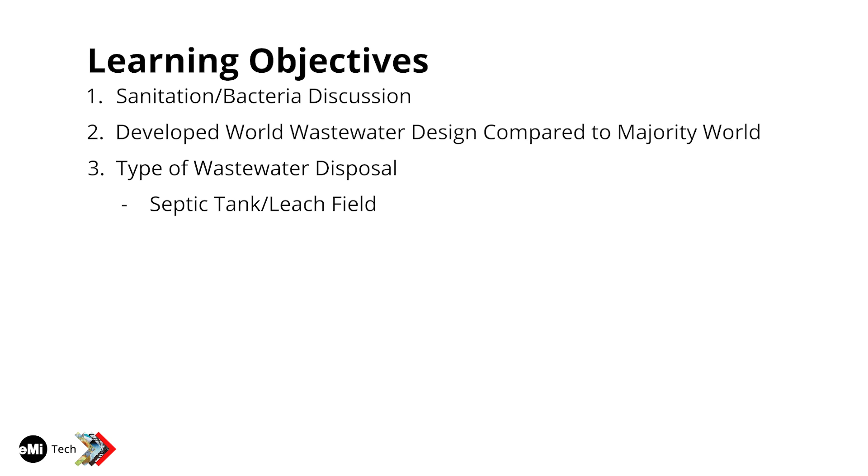So today I'm going to be talking about sanitation and bacteria. I'm going to talk about the developed world compared to the majority world. The type of waste disposal I'll cover today is septic tanks and leach fields, pour flush toilets, composting toilets, and biodigesters. But there are other types of disposal, such as lagoons and wetlands, mound systems, ETA systems. So don't think this is all there is.

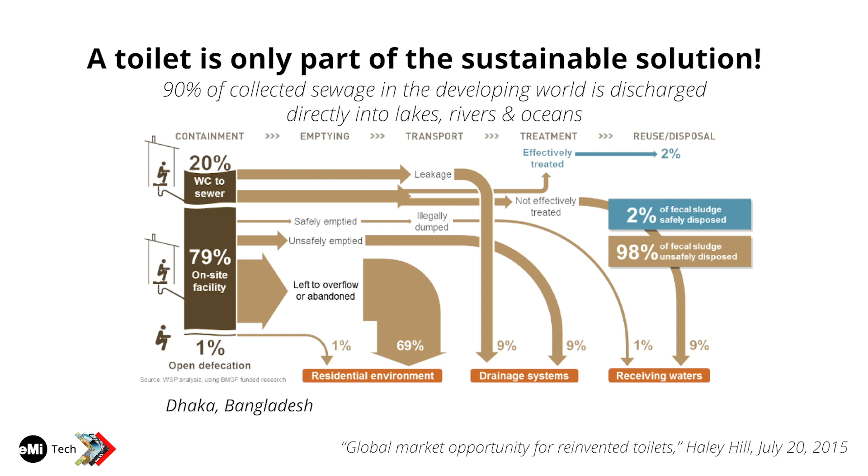This slide is very eye-opening because when we do what we do, a lot of times we think that if we put in a toilet, we've done our part and everything will be fine. But this is a study done in Bangladesh, and it showed that in this area, 20% were connected to a sewer, 79% had an on-site facility, and 1% was open defecation—which, by the way, in rural Cambodia they have 85% open defecation. What this shows is even though they were connected to a sewer, even though they had toilets, bottom line is 98% of the fecal sludge was ultimately being disposed of improperly. So the whole solution wasn't figured out.

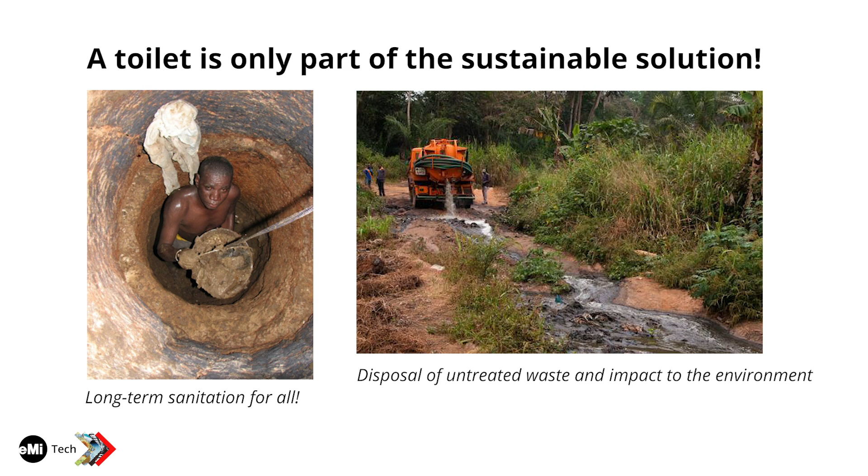So these are some pretty deep thoughts. I've seen a lot of very graphic things on my trips, but this is an example of a man cleaning out a pit manually, which means he jumps down into the pit. I've been on projects where I've seen people down in septic tanks, bucketing them out. The picture on the right is a classic place where they may pump the wastewater, which is good, but then they dump it in a place where it can go down through villages or into lakes. So there really is a lot to this.

The typical EMI design is a septic tank and leach field. But imagine if somebody from China came over to the United States and read about some poor area, and decided the United States needs help. So in a rural area, they design a biodigester with a squatty potty, and since there's over 18 million biodigesters in China, they feel they've done a good job. But the problem is in America we have abundant, cheap electrical energy, and most people won't know how to use a squatty potty. This shows the flip side - we have to be really careful when designing in other countries to truly understand their system.

The other thing I'll add is here we commingle our wastewater and sink water - black water and gray water - but sometimes on EMI trips it's really beneficial to separate those two.

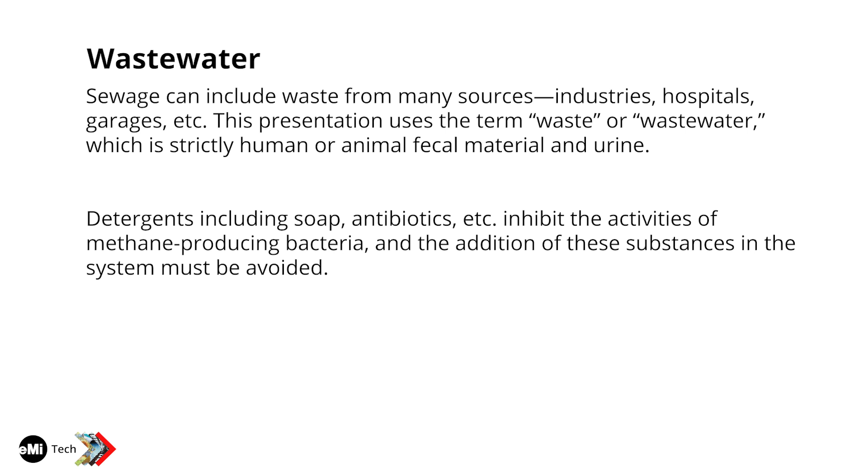During this presentation I use the term wastewater all the time, and I want to clarify that I'm talking about basic human wastewater - not the complicated wastewater we have in America with industrial waste, soaps, and antibiotics, because if you put detergents in a septic tank it's not going to behave very well. So I'm using the term wastewater pretty loosely.

For us, we look at wastewater as something icky that we don't want any part of, but you'll find that in different cultures they make use of waste - this is a very common thing. What we're trying to do is find a safe way to utilize this waste so that it's healthy for all.

On a typical EMI project with a septic tank and leach field, we have the septic tank as the main part, a distribution box, and leach fields. These leach fields are very critical in how they're designed because they have to be really flat to behave properly. We also have pipes that go to the septic tank and cleanouts. I say all this because people look at biodigesters as complicated, but even what we do here - a septic tank, distribution box, and leach field - is a pretty elaborate device.

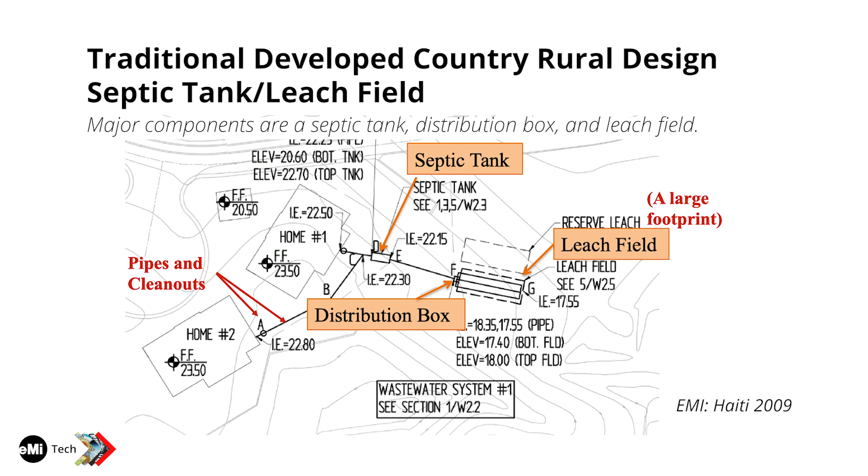In all honesty, my recent trips to Cambodia have been not only on the design phase but also construction, and I found it incredibly difficult working with contractors to build a leach field. On paper it sounds so easy, but in the field, trying to explain how small invert differences make such a big difference in keeping the area flat, I got fed up and switched to a chamber system since they sold them all over the place - it was just so much easier.

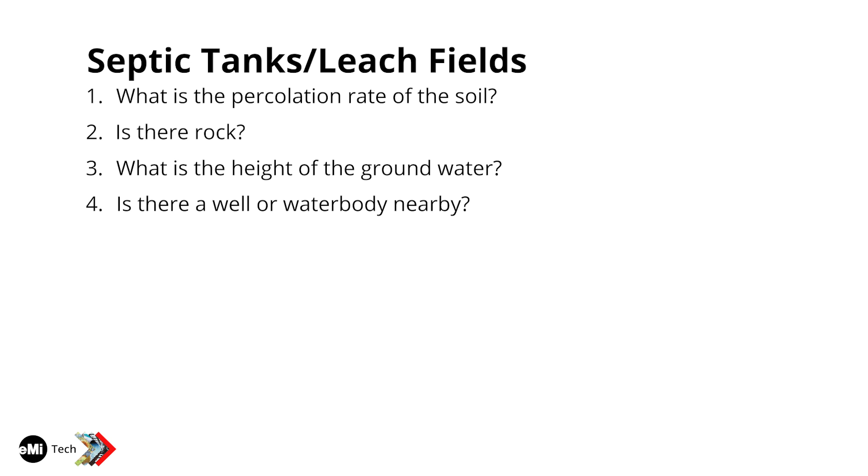Although septic tanks are beneficial, there are other issues EMI volunteers should think about before putting one in. What's the percolation rate of the soil? Is there rock? What's the height of the groundwater? Is there a well or waterbody nearby? Is there enough area for the leach field and a reserve area - that's a heavy thought, because you may first think you're okay, but you also need a reserve area. What's the topography of the site? And can you have more than one type of system?

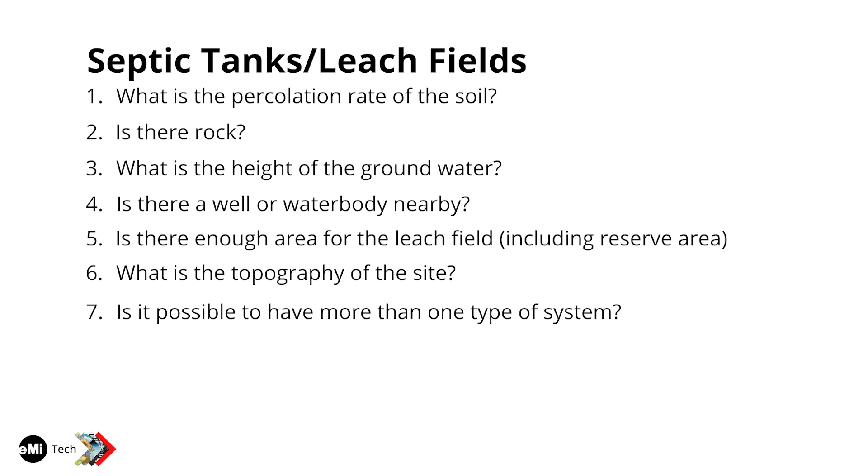Also, is there a need for compost, fertilizer, or biogas energy? The initial thought by most Americans is that pour flush toilets are terrible, but I'm going to challenge that - I actually think pour flush toilets are great, as long as they're designed properly. I've shown a couple of pour flush toilets here where the design is really good, because I like the raised floor and the fact that the water is nearby.

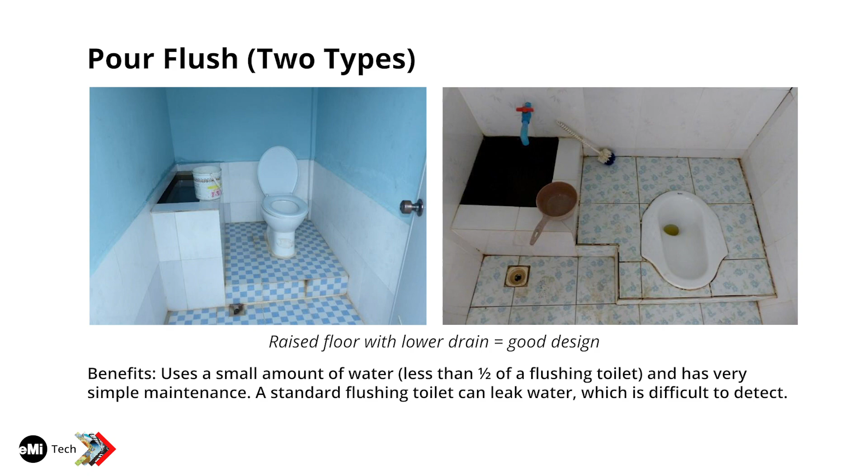With a pour flush toilet, after you do your business, you take a bucket of water and pour it in, and it flushes through. What you see on the left, even though some people may confuse it with a Western toilet, notice it doesn't have a tank - it's still a pour flush toilet. The advantage of a pour flush toilet is it has no moving parts and is very easy to maintain. In America, most people would be surprised how much water we waste from leaking toilets.

Sometimes up to 50% of toilets out there are leaking. In America, where we have tons of water, this is not a big deal. But for us engineers in places that are water scarce, if you have water continuously leaking, it's going to dry out your tank, and then you can have more energy cost. So it can be very complicated. And the flappers in toilets sooner or later wear out, so there can be a lot of challenges to them.

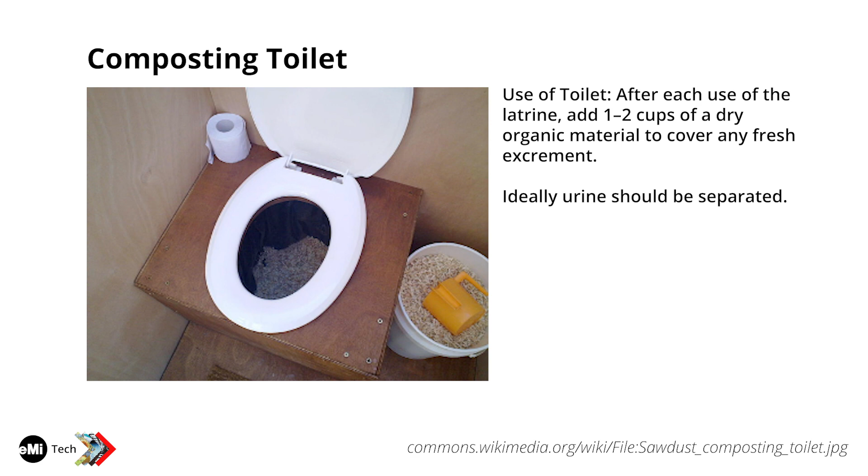Okay, so here is a picture of a composting toilet. This is a concept—I have not done one of these on a trip yet. Ironically, some people in America now are getting into this concept. With a composting toilet, what you do is, after you do your business, you take some organic material and sprinkle it on there.

Basically, what you're trying to do is get rid of all the wet areas. When it comes to dry material, there's a whole bunch of things that can be used, such as sawdust, dry leaves, grass, and so forth. Later, I'm going to show you why that's important when we talk about C/N ratios.

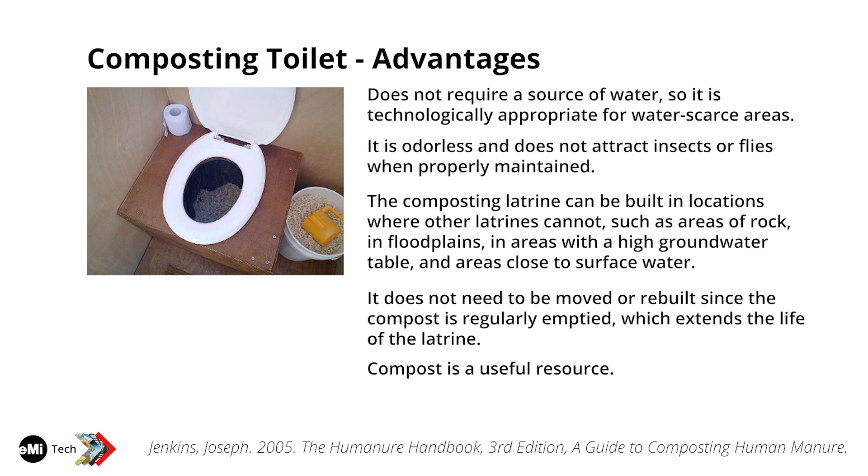It doesn't require a source of water. It's odorless, and it doesn't attract insects if properly used. It can be built in places other systems can't—like a rocky area, a floodplain, a high groundwater area, or close to surface waters. It doesn't need to be moved or rebuilt, which is really nice. And compost, if harvested, is a very useful resource. Urine, if separated, is also a useful resource.

Now, the use of urine is a very tough subject, and that's also something I have not done. But I want to talk a little bit about it because it's helpful to understand the C/N ratio in composting and how the chemistry works on all this.

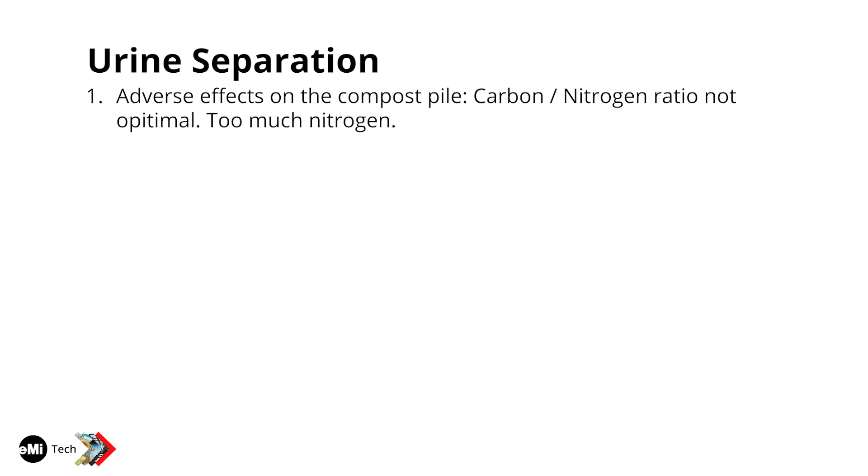The two main reasons for urine separation: when you're composting, you really need that oxygen transfer, and urine, when it wets the pile, really hinders that. The other thing is that the C/N ratio for urine is really lousy, and I have a good spreadsheet that you're going to see in a bit that shows that.

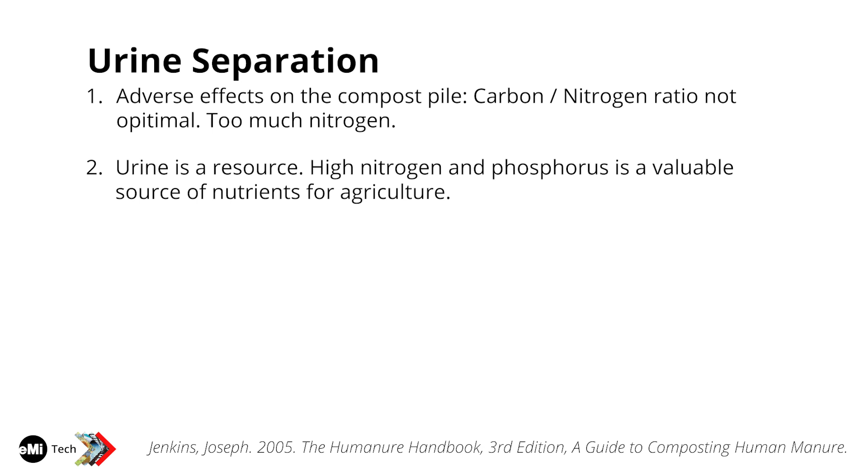Ironically, urine can be a really high quality fertilizer, and the key is mixing it with water—four parts—and then sealing the top. But I also admit that the collection of urine to use for fertilizer, how are people going to deal with that? I don't know, but I am going to put it into practice on one of the projects in Cambodia. So the knee-jerk reaction is that this would be a really hard sell. But then, when people are out there taking cow patties for fueling, it makes me think it's not such a hard sell.

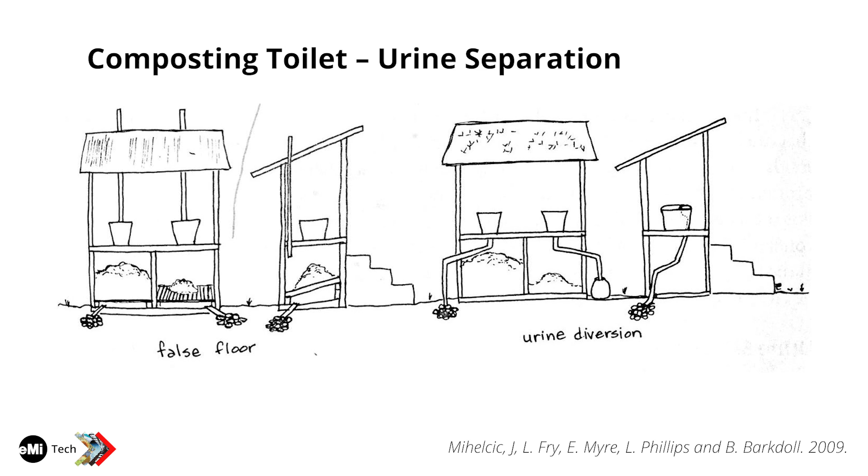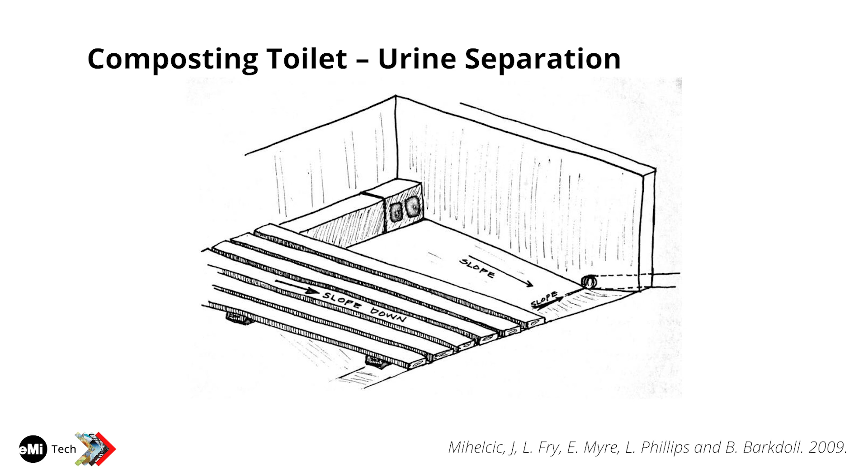Here's a close-up of the false floor, and this is a very simplistic design. In this case, the urine could either be wasted or collected. But there are also other designs that are a little bit more innovative.

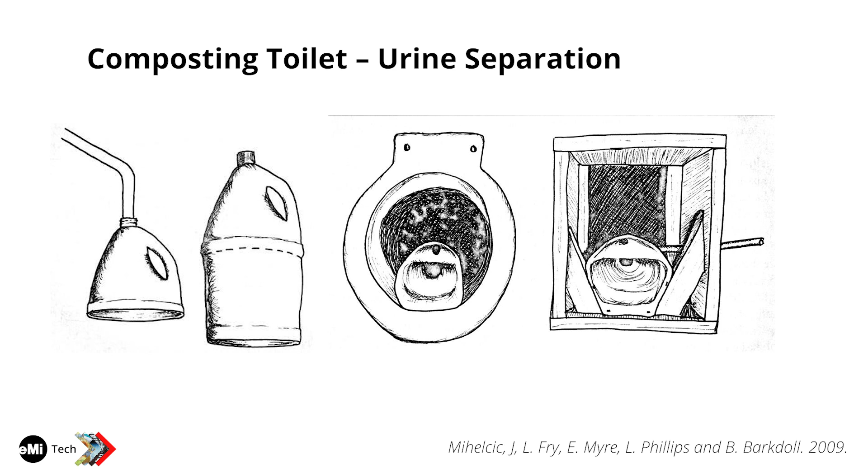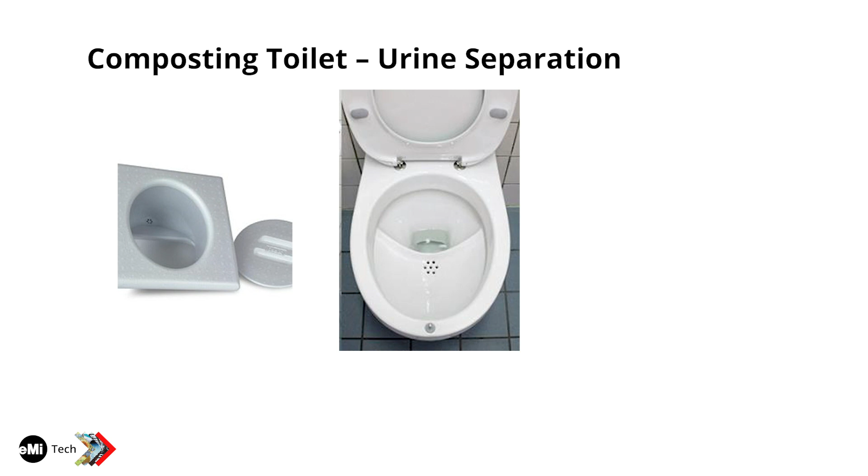On the project I was at in Cambodia, it was really common that they had urinals all over the place at the back of the buildings. In that case, it would be super easy to collect the urine. And surprisingly, there are actually manufacturers now starting to manufacture toilets to collect urine, like what you see here. Where this goes, I don't know, but I think it's good for people to be thinking outside the box.

So with compost, after it goes through a composting toilet, the material is digested and it doesn't have a lot of odor. When you think about store-bought fertilizer and put that on grass or dirt, it's easy for that to wash out if it rains. It's completely different with compost, because compost binds into the soil and becomes part of the soil a lot better than chemical fertilizer does. So it has greater fertilization value than raw manure.

I've got a slide on this later, but I'm definitely not talking about night soil. Don't ever confuse night soil, which is the application of raw wastewater in a field, with the use of composting. Two completely different things.

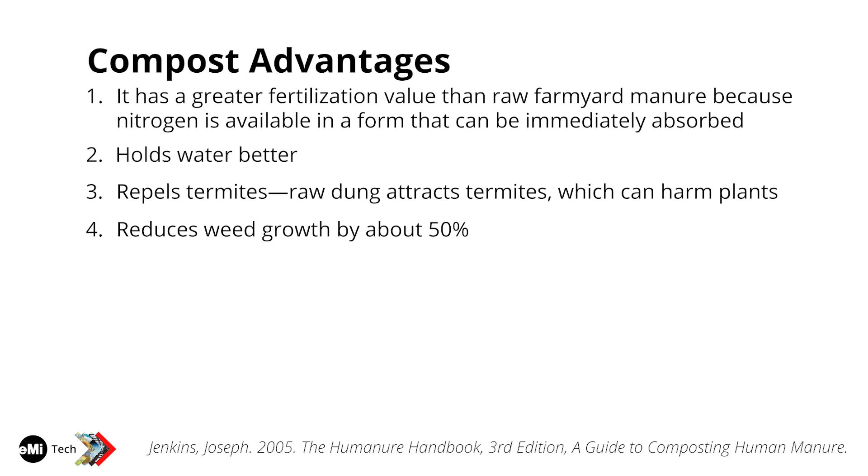Compost holds water better, repels insects, reduces weed growth, adds slow release nutrients for plant growth, and creates airspace in the soil.

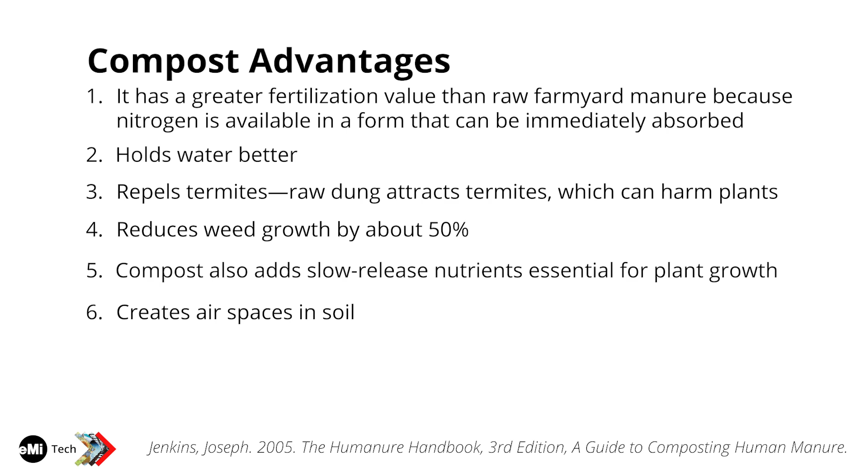Where we live, we have abundant energy, and it's really common that when it comes to methane, we flare it off. Not in all places, but it's very common, and we do that just because we have so much energy that it's not profitable to mess around with methane. So they just flare it off.

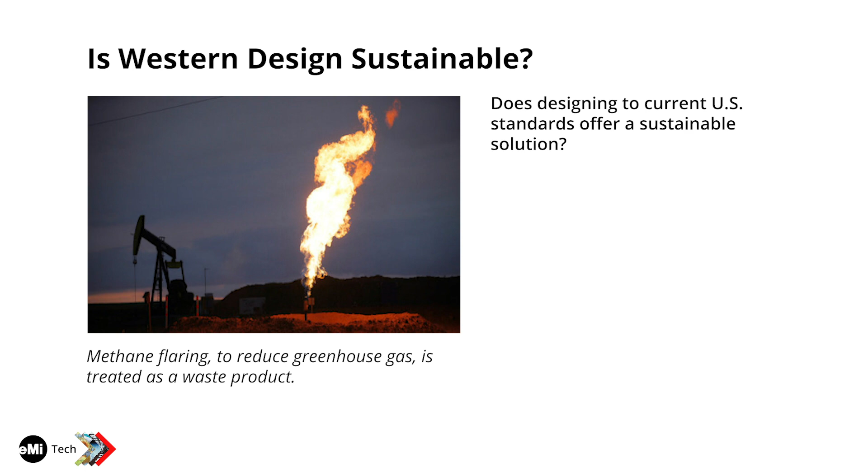We have to think about the clients we're serving and whether they have abundant energy. Another interesting way to look at this is that in our culture, we treat water, which is very expensive - it uses energy, uses chemicals, puts greenhouse gases in the sky.

But then we use that water that we treated to flush our toilets, and then that water again has to be treated, which uses chemicals, uses electricity, puts greenhouse gases in the sky. So the key is sustainability is a huge issue when we come up with designs - that's why we have to think outside the box a little bit.

I've been really fortunate because I've had the chance to go into a lot of villages, especially in Cambodia, and I can almost always tell whether a village has a biodigester in it even before I ask anybody, because in a village that has a biodigester, there'll be less waste laying around, and it won't be smelly.

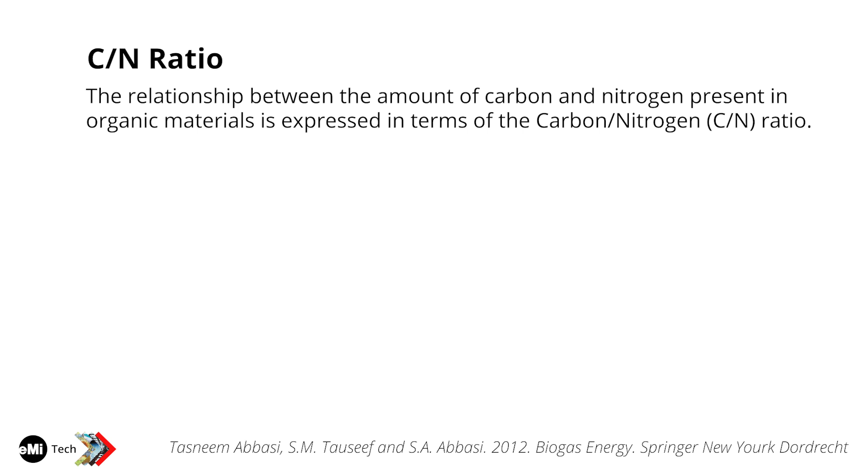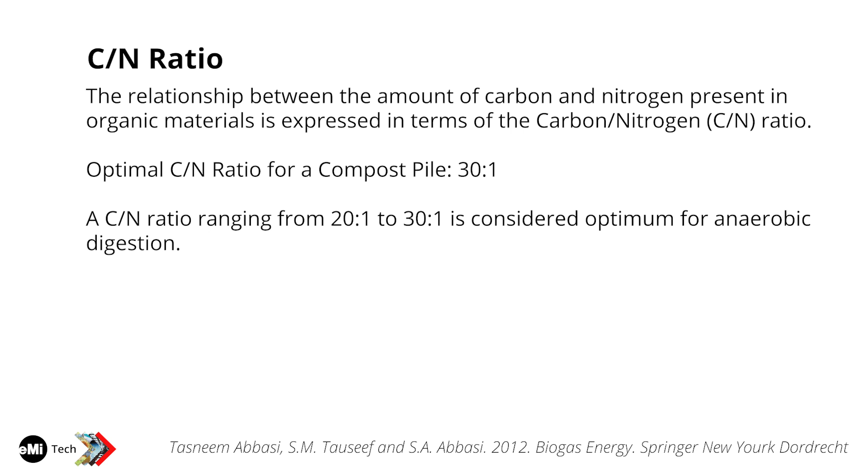Before we talk about biodigesters, I want to talk a little bit about C/N ratios, because this all ties in. A C/N ratio is a relationship between carbon and nitrogen. Our goal C/N ratio for a composting pile is around 30. C/N ratios are really tricky because if they're too high, the nitrogen is consumed rapidly by the methanogens. But if it's too low, the high pH will kill off all the methanogens.

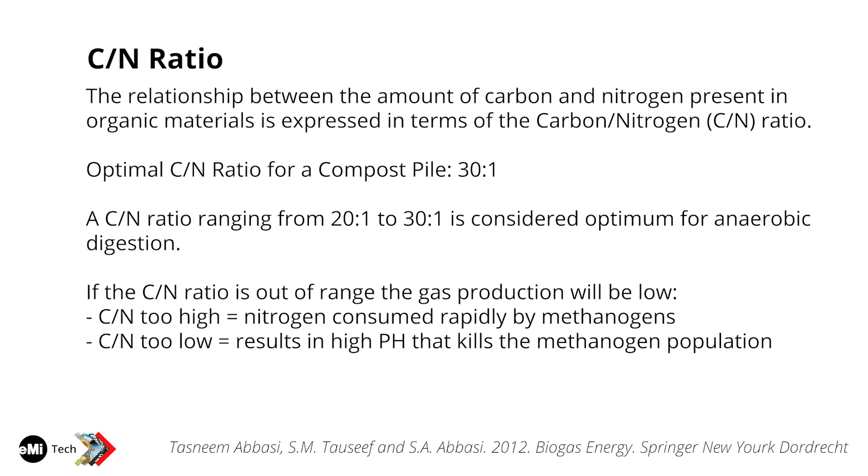So our goal is to try to find a C/N ratio that is in that sweet spot where we can help our methanogens - who are my best friend bacteria, by the way - so that they can do their job.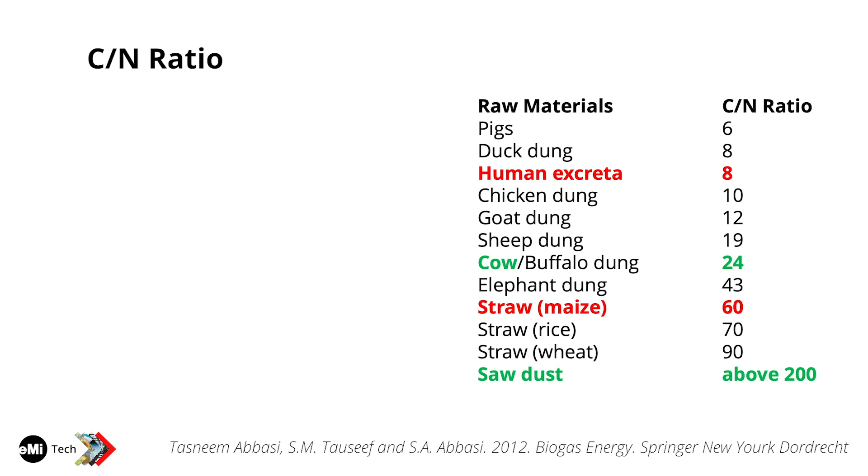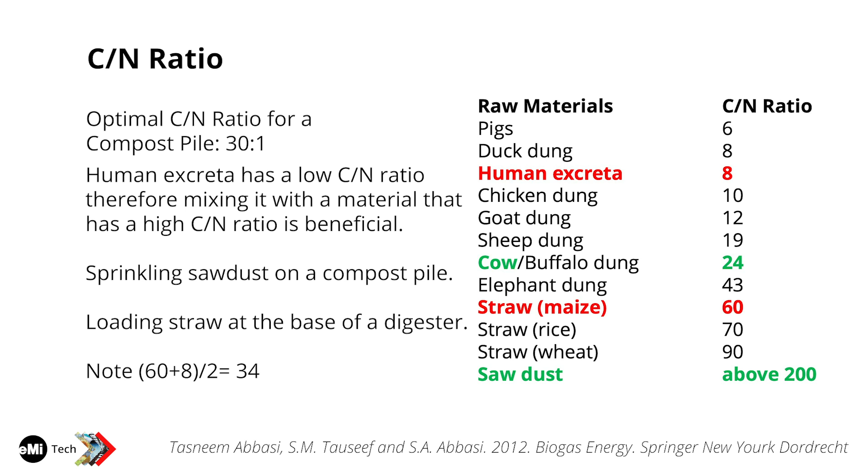If you look on the right side here, you see a bunch of different types of raw material and what the C/N ratio is. Keep in mind, the target is 30, and here we can see that human waste is 8, but straw is at 60. It's interesting that in China and Asia it's really common where they take human waste and mix it up with a little bit of straw, just like what we were talking about before. You can see what they're trying to get to - if you take 60 plus 8 and average the two, you get around 34, which is that sweet spot of what we're going for.

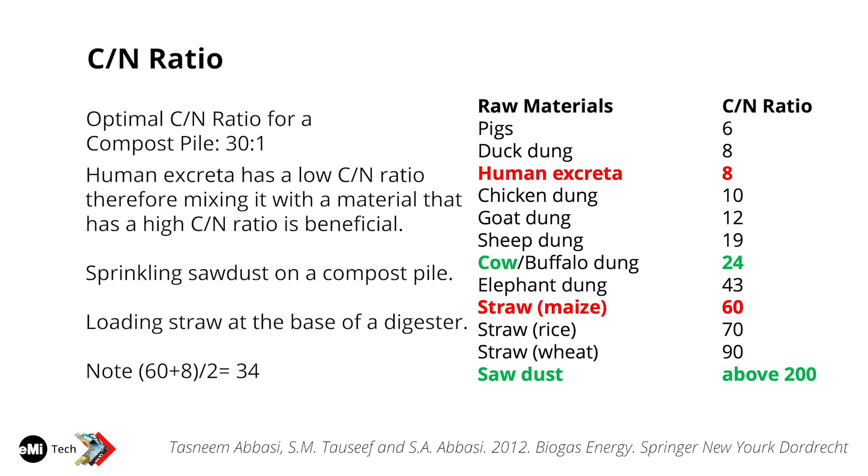As you can see here, different kinds of animals produce different types of C/N ratios, and this is an important consideration when you're choosing a biodigester. Also look at the power of sawdust - it doesn't take much sawdust to really increase a biodigester's C/N ratio.

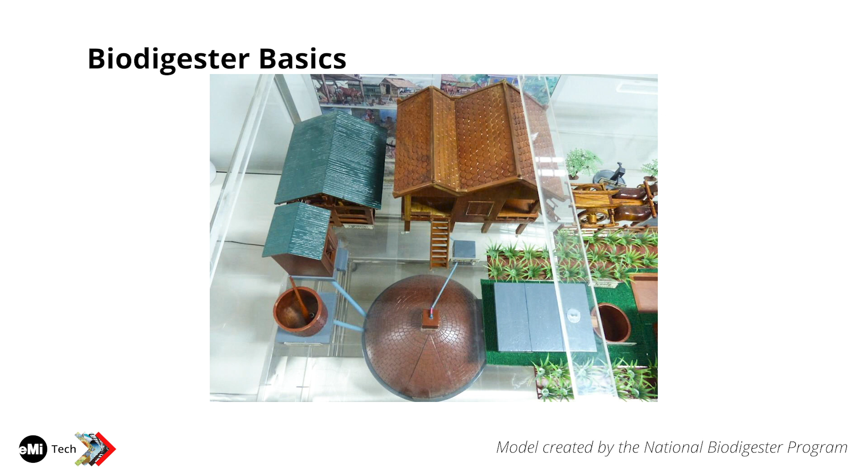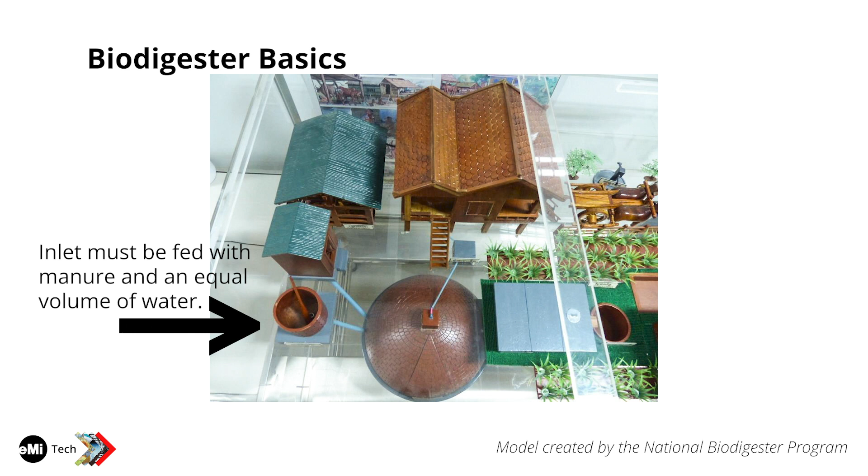Okay, so this is what a biodigester looks like. This is a model of one. The way that this works is this is where the animal waste will be fed. Water is also put in here. This is a latrine, and as you can see, it's channeled directly right into the biodigester.

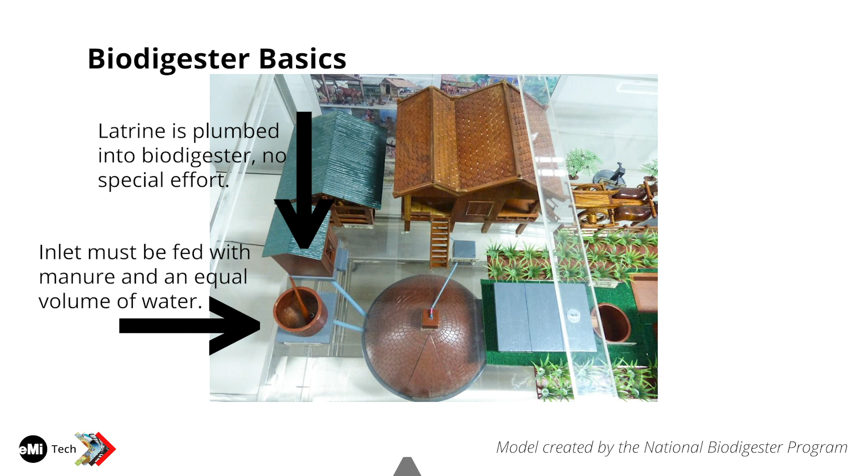This is the dome of the biodigester, and my designs that I've worked with are fixed domes. I'm not saying that fixed domes are better than floating domes, but from a maintenance point of view they are way easier than a floating dome, so that's why I favor fixed domes.

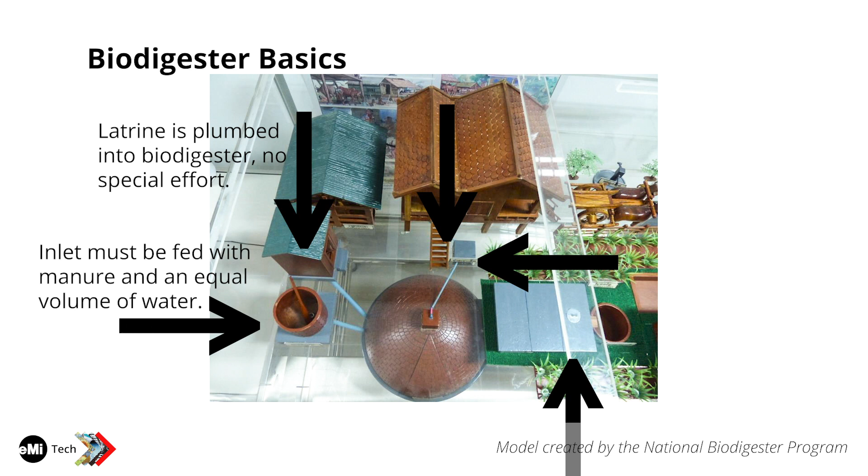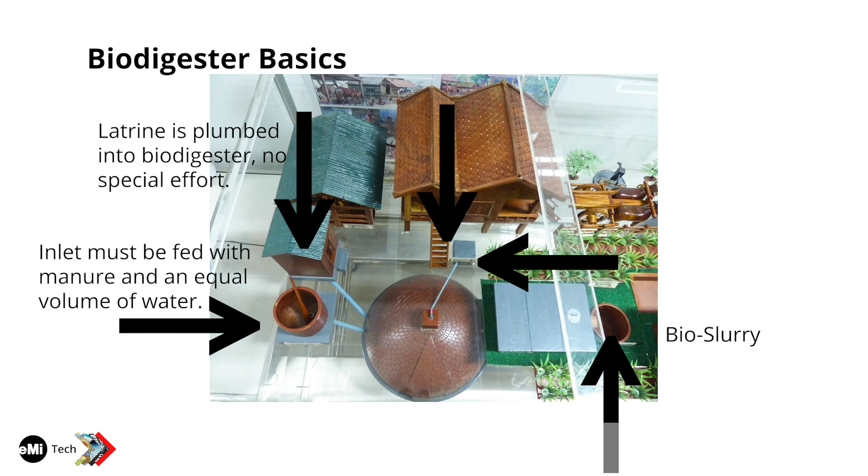Then there is a pipe that leads down to a junction box, and then there's a pipe that goes over to the structure. When the waste is in here, between here and here, it hangs out for 35 days, and it works through this system, and then it comes out here. Once it's here, it's this high-quality bio-slurry, which I have some pictures of. Even though it looks gross, it has no odor, and it's super, super good fertilizer.

I've talked to many people, and the farmers love biodigesters because of the bio-slurry, and the ladies of the house love the methane gas because for them it's like a microwave. They don't have to worry about getting charcoal, heating up the charcoal. They can just turn on the flame and it's right there.

So what happens is in Cambodia, the majority of Cambodia is Buddhist, and all households will make food for the visiting monks. In their culture, you can have food that is made from animal waste in the process - no big deal. But food that has anything to do with human waste is a huge deal.

So biodigesters that are by Buddhist people will not have this pipe here, but Christian organizations will because of their views. So this is where it's tricky from a society point of view.

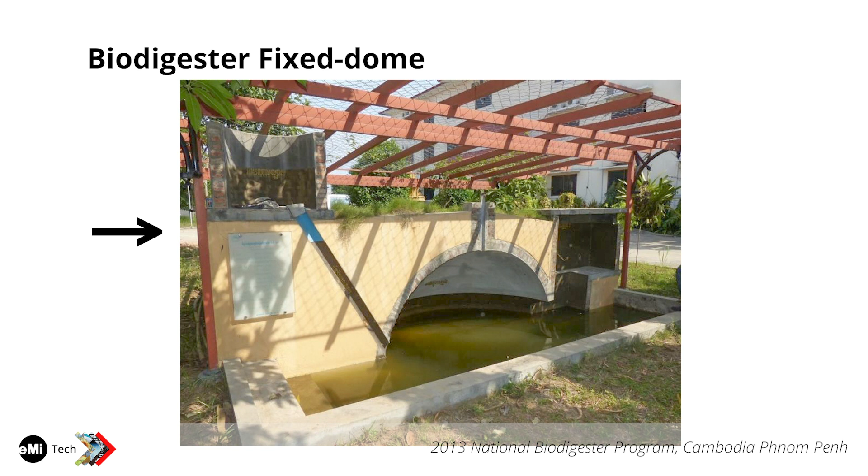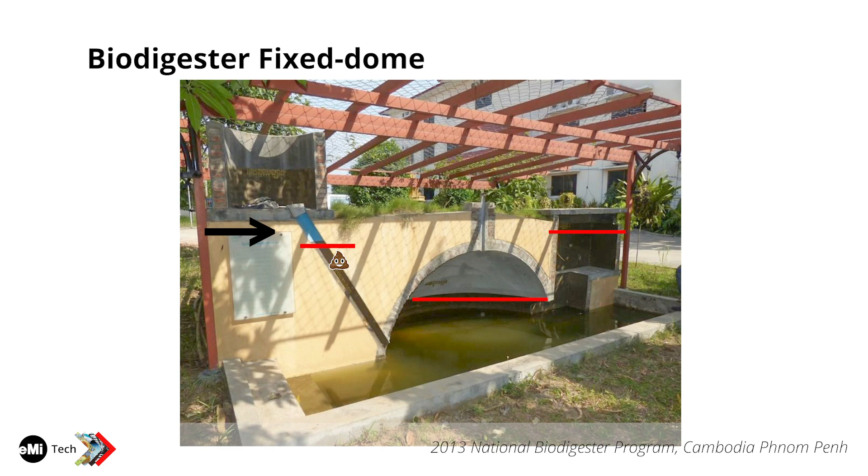But every day this is fed, and every day a little bit of waste comes out, so it's just a process. It's a slow-moving process - some comes in, some comes out.

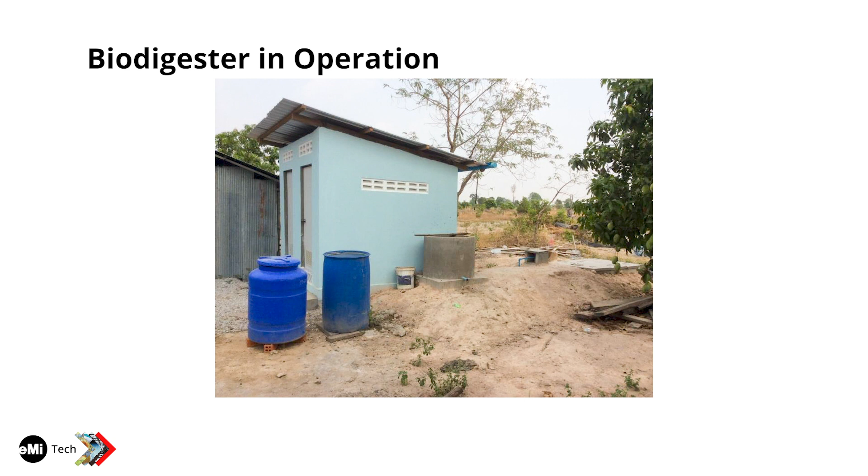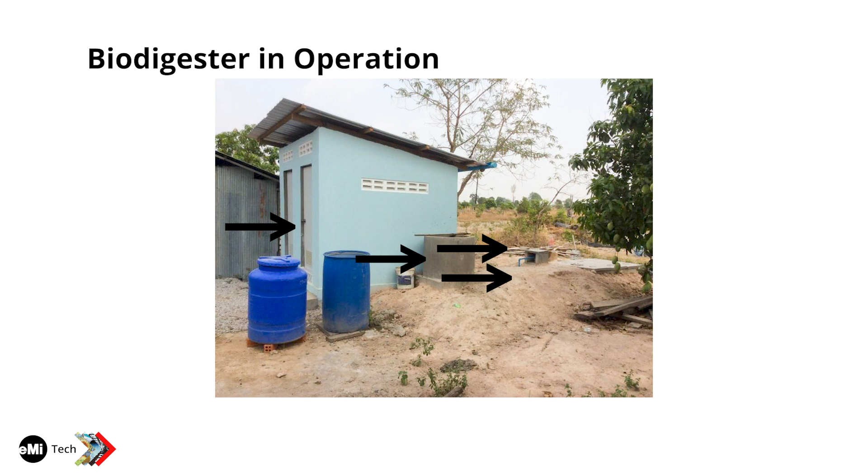So this is one that I built in Cambodia, in Anlong Veng, near the Thai border. In this picture, this is where it's fed. This is the dome, the top of the dome, and this is the outlet. But this latrine is tied in with the biodigester.

Here's a picture of the inlet, and this lady loves the biodigester. To them, they're the talk of the whole area, because this was the first biodigester that was put in the Anlong Veng area. There are a lot of other biodigesters in other parts of Cambodia, but this is the first one in this area.

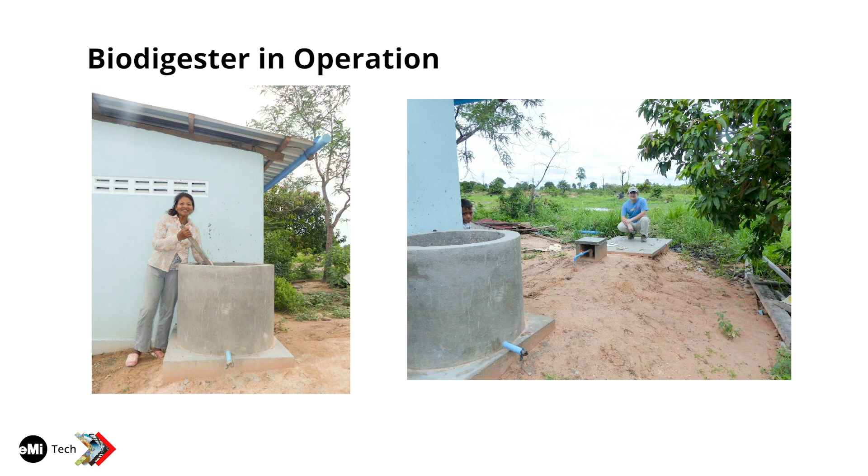And then I'm sitting on the outlet of it. As you can see, the footprint is pretty small. People will say, well, biodigesters, they're way complicated, they're so confusing. But think of a septic tank, think of a distribution box, think of a leach field. This stuff is not very difficult.

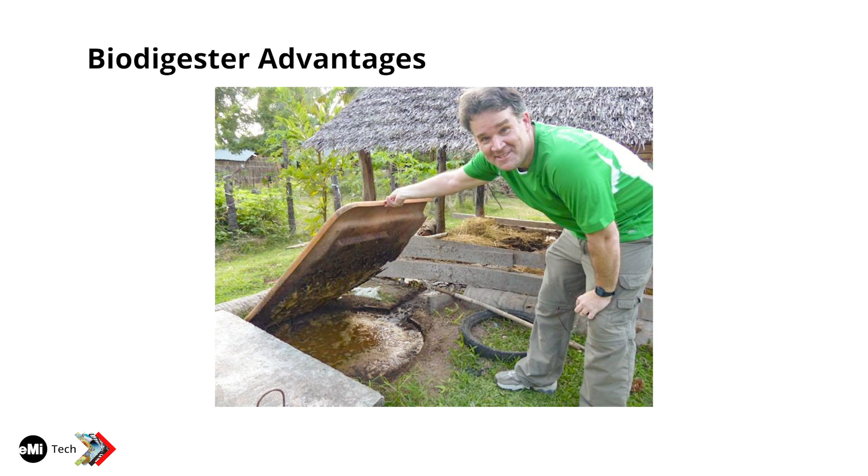Okay, so I don't want to lose everybody on this one, so give me a little bit of grace here. This is what the bio slurry looks like, which looks horrible, but just to prove to everybody that it doesn't smell, I made a poop stick, stuck it in there and smelled it. What's amazing about this is there's absolutely no odor at all.

There's no flies, and the contrast between, like, if you see a cow patty and the amount of flies that are on that cow patty compared to this, it is night and day.

So they use this material for farms, and this is a work in progress. A lot of people are doing it, even though I don't have studies to show how beneficial it is. But they're using it a lot in aquaponics to feed the fish, and they say that the fish just love this stuff, and it helps the fish grow more healthy than the food that they can buy.

So at this farm, we built a fish farm, and this is an experiment that I'm going to do - have them start feeding the fish this stuff and see how much of a difference it makes.

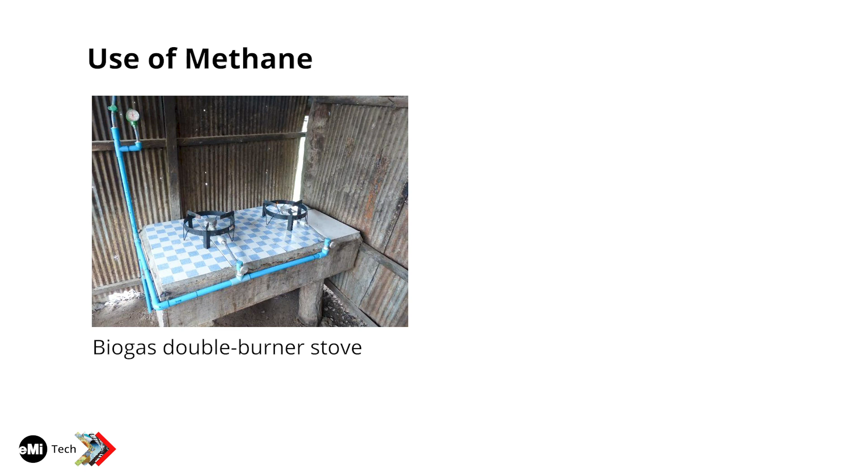So inside, it's very simplistic. These are the burners, and there's a pressure gauge right here. There's enough pressure to force the methane gas all the way through. Then all that happens is when they want to use it, they just turn on these valves and light the burners, and then they're good to go. You can also use it for lighting as well.

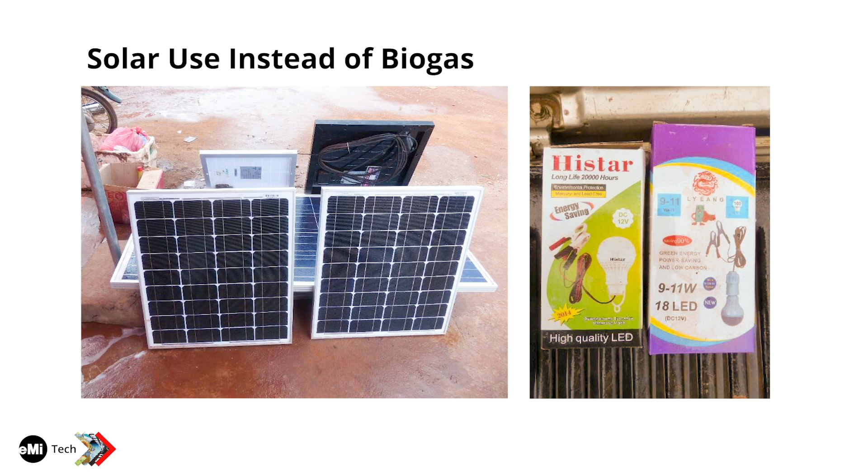But the bigger issue is solar, because now that we have solar, I can't believe how even in the most rural areas I've gone, I see solar, and it's so easy for people to put in a solar panel and a light to get their light. But what's handy with that gas is it's a good backup light.

Before we put this biodigester in for these farmers, once the sun went down, they lived in the dark, unless they lit a fire, which usually they didn't because due to all the deforestation, there's not a lot of wood around. The other thing is, if you have a biodigester, you can boil water, and if you can boil water, at least you can be healthy. So the impact of that gas is life-saving.

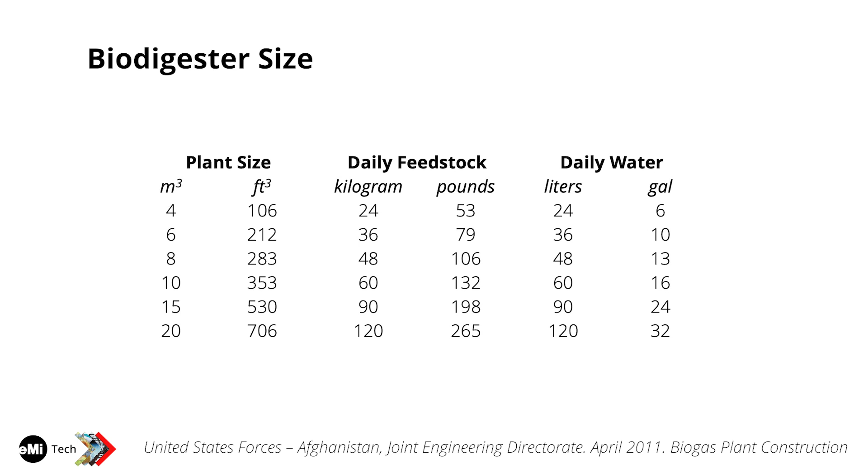The biodigesters I've shown so far are 4 cubic meter size, but it can be scaled all the way up to 20 cubic meters and probably even beyond. The organization I'm working with, the contractors that build these things, these are the standard sizes they build. But it takes a lot of waste to feed these.

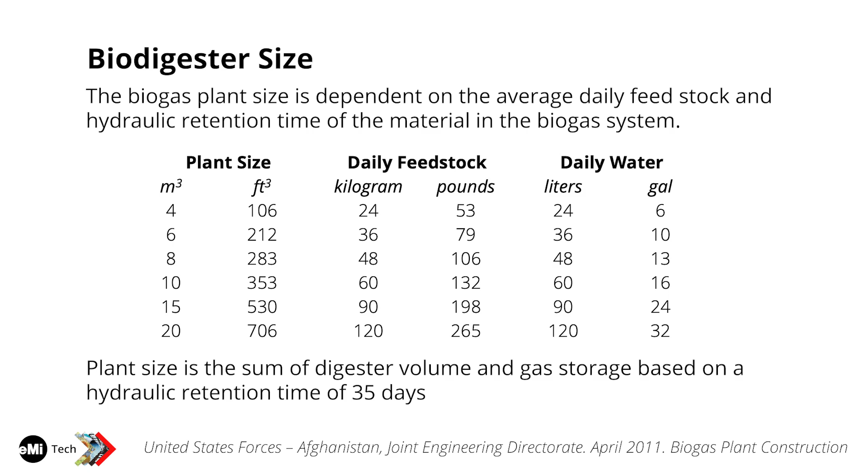So with a 4 cubic meter biodigester, you need 53 pounds of waste a day and 6 gallons of water. This is an example of what they have some of in Haiti, they have some in Africa, but they're a lot more common in Asia because Asia has a lot of water. So if you're in a drought-restricted area, these can be pretty tough.

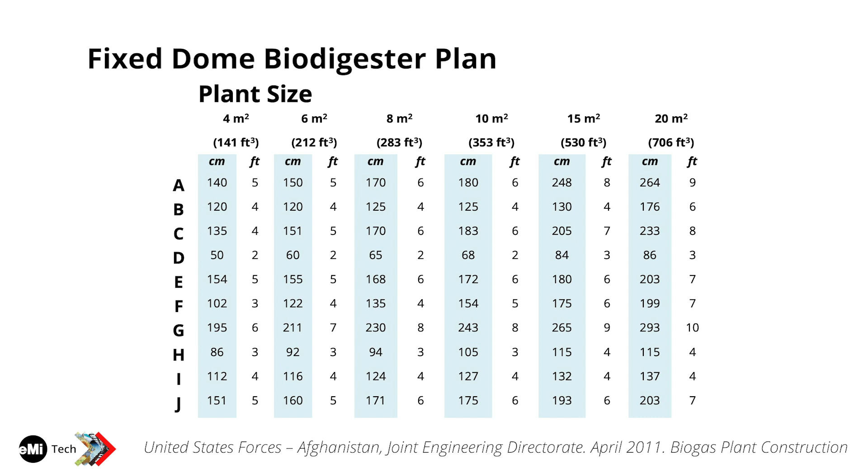To me, the design of these things could be very regimented, because all we have to do is make tables like this. Even though you can't read the numbers, the idea here is that each of the dimensions, depending on the size of the biodigester, we can show what the dimensions should be so the designs can be pretty simplistic. What's nice about this is that we know many of these have been built, so we know that if we design it with these standards, we're going to end up with a really good product.

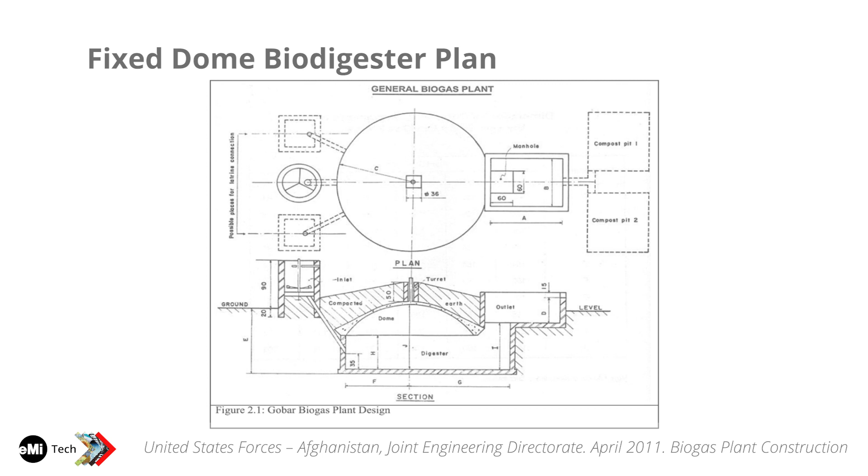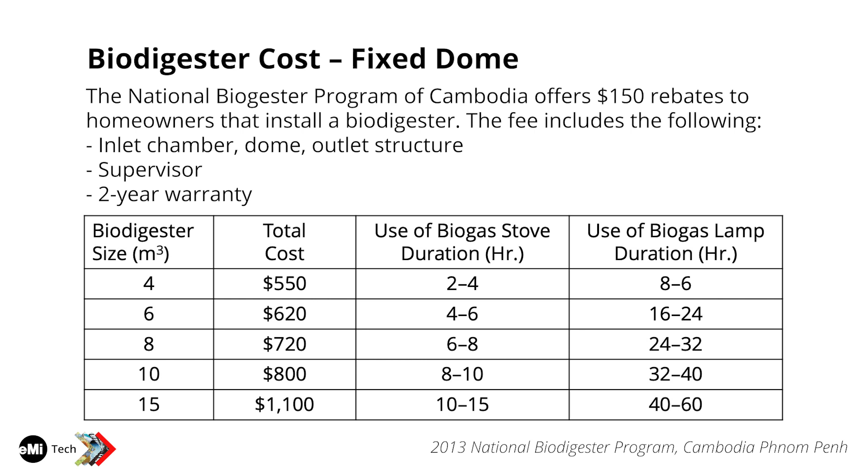For that 4 cubic meter, you get 2 to 4 hours of gas for cooking, or you can get 6 to 8 hours of lamp use. It's up to the user how they want to utilize the biogas they generate. So these things pay for themselves really quickly because of the cost of charcoal.

Plus, it makes the farmers very independent, because in a way they're living off the grid. So as long as they have animals, as long as they can keep feeding it, they can keep generating biogas.

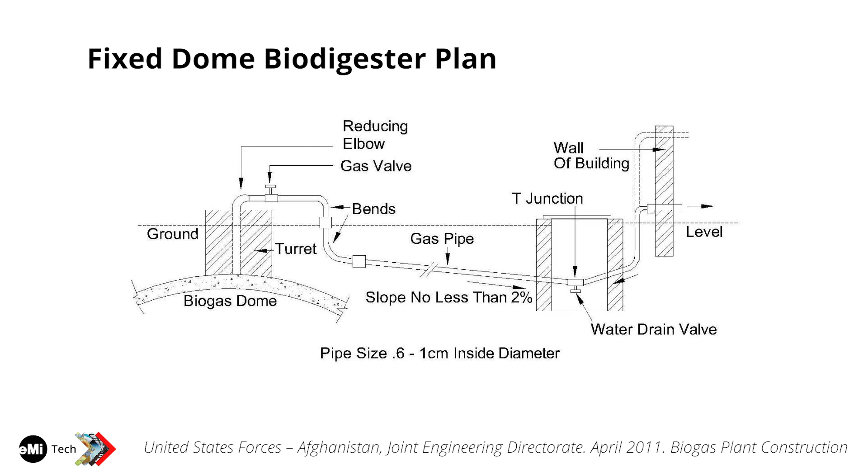Unlike a septic tank and a leach field, there's a lot of give and take on this, because the gas is under pressure, so it's going to find where it needs to go.

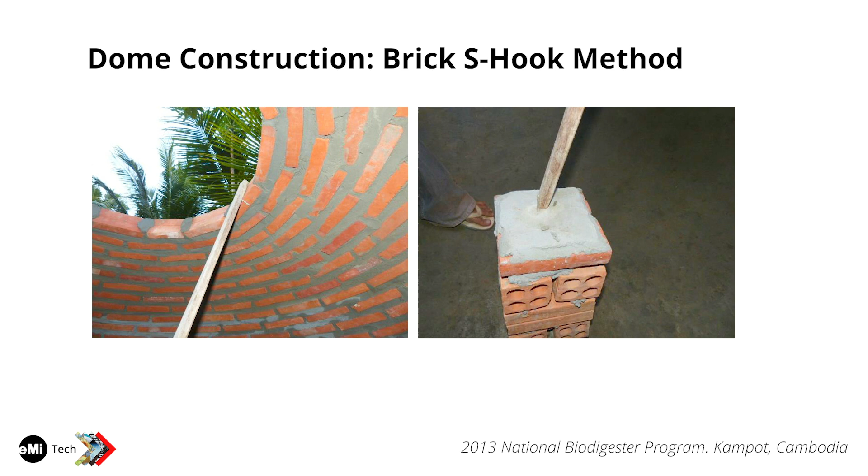Building these things, I've really enjoyed seeing how good they are at building them. The typical thing I've seen is they have a stick with a nail in the center. Then with this stick, they use it to place this brick, and then move to the next one, and the next one, just going round and round.

They use a counterbalance on the other end to keep the brick from falling in. So the process is moving the stick around, having this counterbalance, and working your way round and round. It's really great because these contractors that build these biodigesters are so proud of the work that they do.

And they're just so incredibly fast. One of these was built in 5 days while I was there, from breaking the original ground to the whole thing being built, which is really neat stuff. But they take a lot of work, being really precise and making sure that everything is leveled up really good. So it's a nice thing to see.

After 2 years of operation—this biodigester has now been in place for 3 years—but last year, I keep up on it, and I got a call that the gas pressure had decreased. We found out that the farmers were actually putting up walls around the burners to keep the flame from burning out.

But I knew they were using the same waste, the same process. The answer is there's a drain valve in the line, and the reason is that condensation develops in the line after some time. Sometimes it takes a long time for this condensation to develop.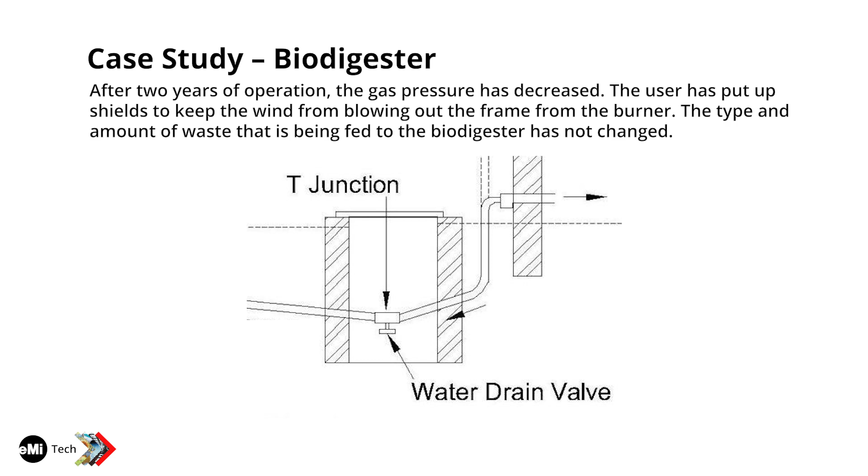I'm talking like years. In this case, I was talking to somebody through my smartphone and told them to open up the valve, and asked what happened when they opened it. They said a whole bunch of moisture came out. I said that's good. How's your flame now? They said, oh, it's super strong, just like it was when we built the thing.

So the point of this story is we have to be really careful—even though we give instructions to the people using it, it's hard to remember all this stuff. So dropping in on the systems we design every once in a while is really beneficial. In this case, I showed a graphic of this a couple minutes ago.

So the answer to the question for us was very clear there. But you can just imagine a farmer that doesn't understand all this technology—sometimes it can be hard for them to understand all this.

So some challenges with a biodigester: it has to be fed every day, it requires water, and it's not very good in cold climates. You can use solar to help that situation, and there are other people like Bill Gates trying to come up with technologies to use biodigesters in cold climates.

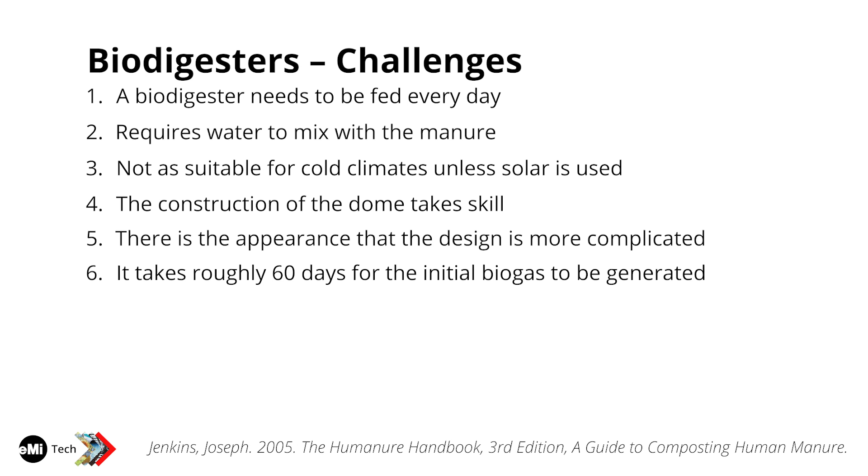It takes about 60 days for the biogas to start developing, which can be really frustrating for the user, because when they get these in, they're so excited and want to start using the biogas all the time, so they have to be patient. And there are a lot of biodigesters out there that have given biodigesters a bad name, a lot of innovative designs.

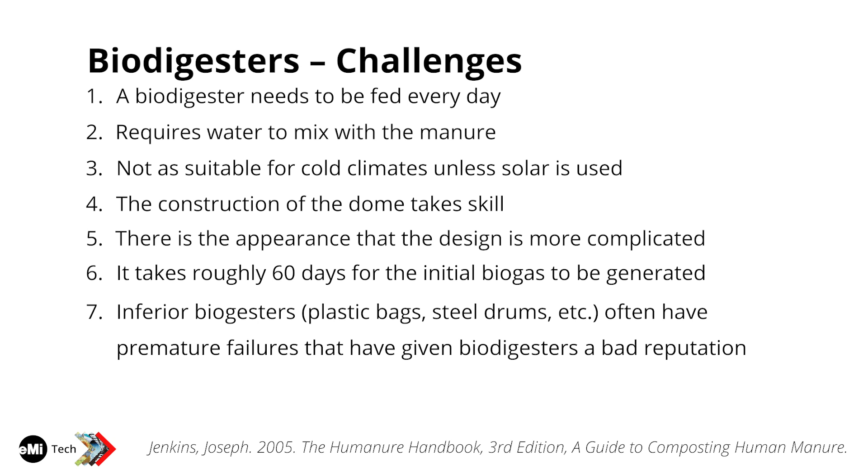I'm not saying these innovative designs are bad, but the reason I'm using the fixed dome biodigester in Cambodia is because I know they've built about 30,000 of them, and in their culture, this is a biodigester they're used to. For me to go there and introduce a floating dome biodigester — it's true it may generate a bit more methane gas, but the minute it quits working, nobody's going to know how to maintain it. So this is a real cautionary tale: with water and wastewater, it's like voodoo engineering.

There are so many different techniques to treat water, and so many different techniques to collect methane, but you just have to be really careful. Something I've learned, because I've gone on a lot of EMI trips — to be honest, I have a lot of regrets about designs I've done in the past that I think could have been done better, which is what leads me to want to do presentations like this.

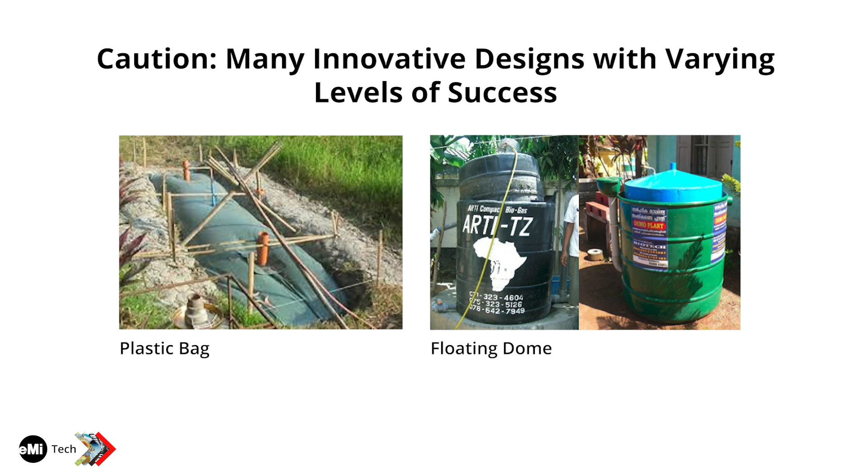Just really think about how it's going to be used, not just in the short term but in the long term. So this is what some of these innovative designs look like. Again, I'm not saying these are bad, because if you're in a place where everybody is using them and they're part of the culture, then they could be okay. But these plastic bag types, it's really common that they leak.

There's just a lot of negativity if you look on the web about these things. I really like Water for World, and they have some really good suggestions for designs. But the Water for World design for a biodigester is so confusing and so convoluted that I don't understand it at all, so this is one example where I wouldn't use Water for World for biodigester designs. But if one of you guys figure it out and think it's great, send me an email.

What's the advantage of the floating dome versus? The floating dome rises and lowers, so it can give you a little bit more constant supply of methane gas. But the problem is it has rollers — it has movable parts. Whereas a fixed dome doesn't move at all.

So in conclusion: research to find out what works in the area, and take time to find out if there are existing organizations trying to achieve the things you want to achieve. I've been working with the National Biodigester Program and developed some really good relationships. The main guy I was talking to was a Buddhist, but whenever I'm there he always attends the church events with me. It's very enjoyable, because sometimes I take a peek at him, and when he's seeing all the little children singing and having fun, it makes me realize that we're really building culture in a great way.

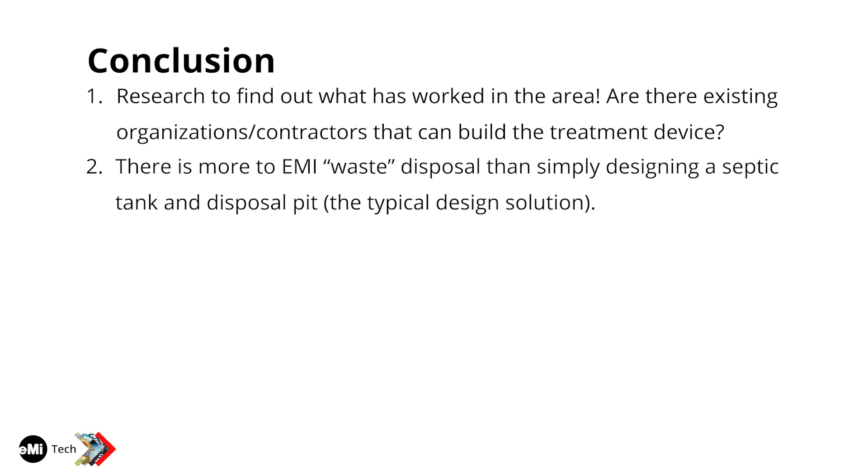There's more to waste than designing a septic tank and leach field. Even though those can be the appropriate design, there's no doubt about that, we need to use every available tool that we have. I like this line: when all you have is a hammer, everything looks like a nail. And that's kind of the classic way that us engineers will design things.

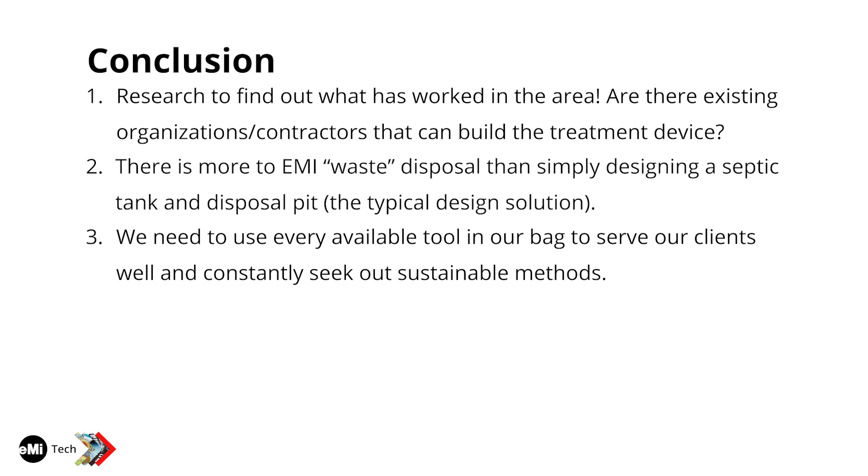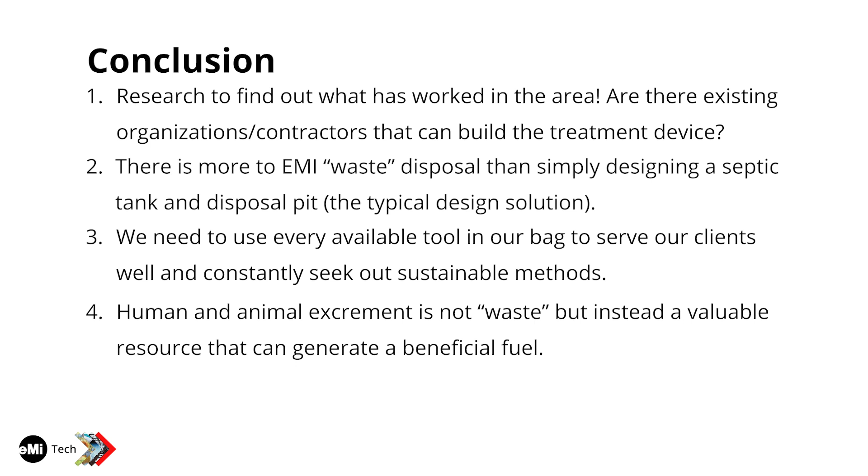Human and animal waste can be a valuable resource, and it can generate beneficial fuel. Keep in mind that in my talk I haven't talked about the production of electricity — you can use biodigesters to produce electricity, but that's so much more complicated than the simplistic design I'm showing everybody. And we need to look beyond our Western culture and engineering experience when finding solutions.

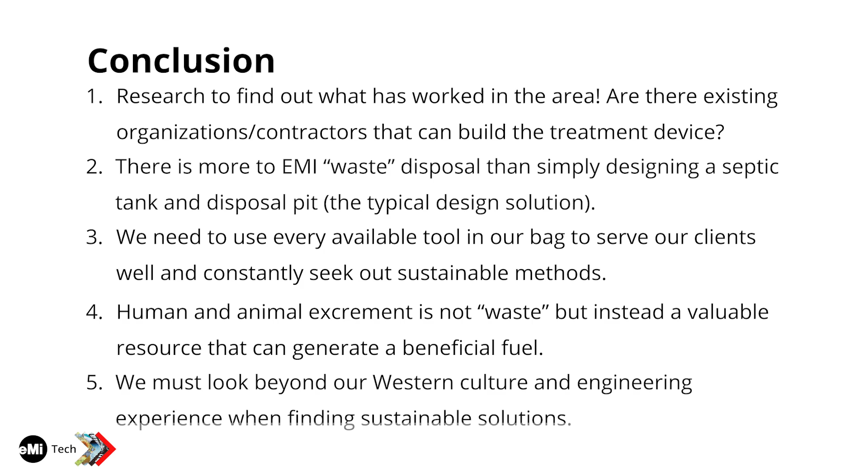So even though this is supposed to be humorous, there's a deeper thought here, which is that we have to be really careful with putting our views onto other people's cultures and not recognizing the difference. Okay, well, anyway, thanks for coming.